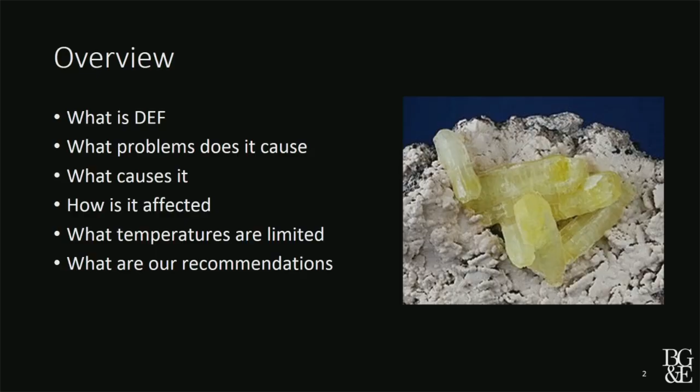Thank you very much. So ettringite is a natural material, it can be found in the world naturally. I won't go too much into what ettringite is, but I will cover some of the things I've learnt over the past 30 years.

My first experience with ettringite, or delayed ettringite, was walking the railway line between Washington DC and Boston. We covered something like 200 kilometres of railway ties, documenting the date they were made and which location in the casting unit they were from. At this stage, walking for 12 weeks documenting ties with 8 other people, we didn't know what we were looking for, but we did notice that a lot of them were really badly cracked.

Then we'd come to things like bridges, and they stopped being cracked. We'd get to the other side of the bridge and they'd be cracked again. We'd go under a tunnel, they'd stop being cracked. So what happened during that period is we were actually looking for periods of railway sleepers, railway ties, that had been made with different cements and different aggregates.

There were lots of papers produced in the early 1990s related to this particular aspect of delayed ettringite formation, ASR, the combination of delayed ettringite formation and ASR. But unfortunately, we will never know the full extent of the information that was available and that was researched at that stage because it got caught up in a legal settlement.

As part of legal settlements, a lot of information gets put in a box and nobody's allowed to talk about it. There are bits and pieces of that information that are in the public. Some I agree with, some I disagree with. But anyhow, this is what started my road down DEF.

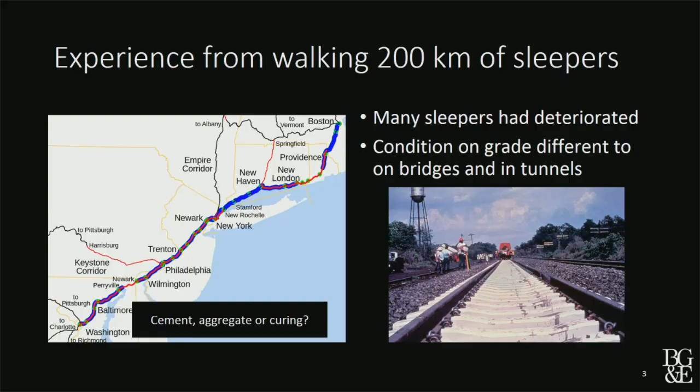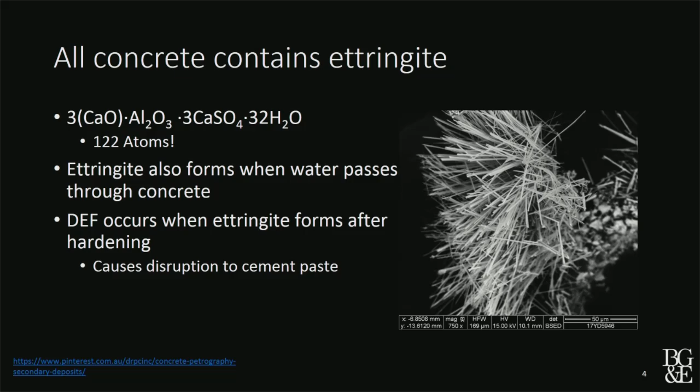So, as we just mentioned, we know about ettringite. This is a picture of typical ettringite that we'll find in concrete, and it always occurs in every piece of concrete we make. So ettringite's not an unusual mineral. It also, if you wet the concrete and dry the concrete, the ettringite will move, it'll appear in air voids. So we know ettringite's mobile, we know it'll form, and we know it's in every bit of concrete.

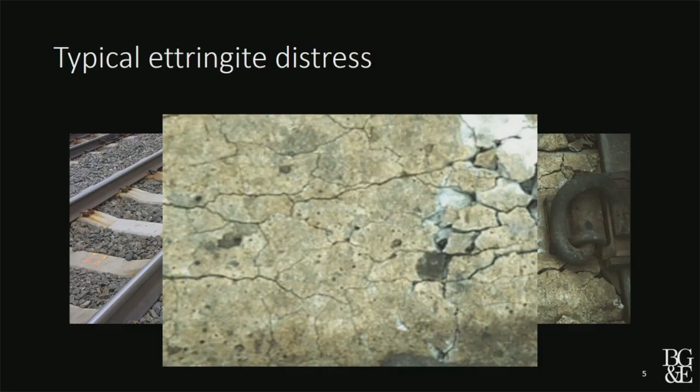So this is the typical concrete distress that was observed on the railway sleepers. It was very rapid - within 5 years of the concrete being made, the concrete was cracking severely, and it was enough to make these railway sleepers unusable and have to be replaced. It was a very large dollar settlement - at that stage, something like $200 million being litigated between various parties.

There have been examples of delayed ettringite formation claimed throughout the world - in France, in Sri Lanka, in Europe, in the United States, in Texas. So the question is, what's going on with this? Why did it suddenly appear?

One of the petrographers that I knew many years ago said we probably didn't know what we were looking for. We didn't have the tools of scanning electron microscope, so we probably attributed some things that were delayed ettringite to ASR. So it may have been a difference of how we look at information - we might have had delayed ettringite formation occurring for the last 50 years and didn't know about it.

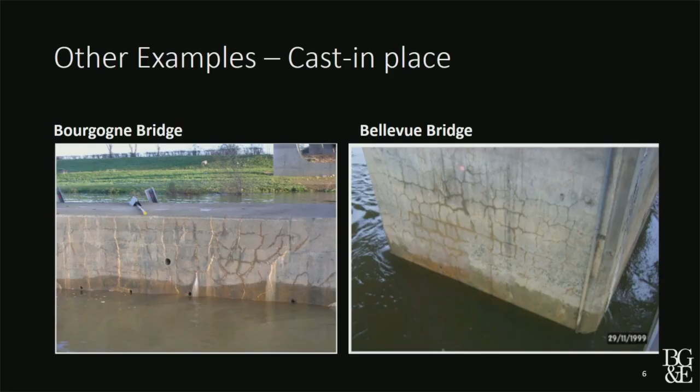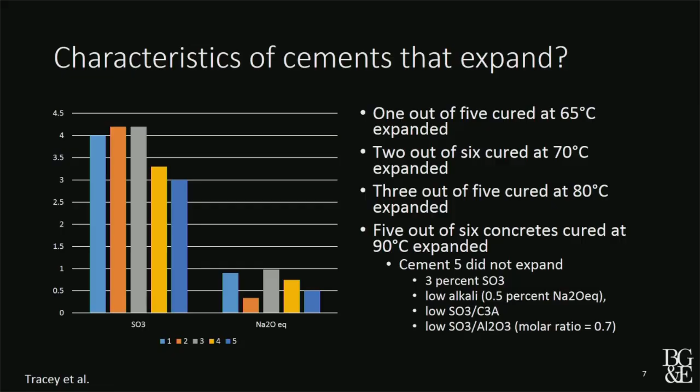There's a piece of research which I think needs to be brought back and looked at, and this was by Kelham, who did a whole bunch of laboratory tests on a very wide range of cements. He looked at 128 different cements, and he found that...

Curing them at normal temperatures, nothing expanded. Curing them at 70 degrees, nothing expanded. Curing them at 80 degrees, he had 14% of the cements expanding, which meant most of them didn't expand. But once he got to 90 degrees, over 50% of those cements showed expansion. So this was showing that there is a critical curing temperature, but it's also showing that the cement chemistry may be playing a more important role in the expansion than actually the temperature itself.

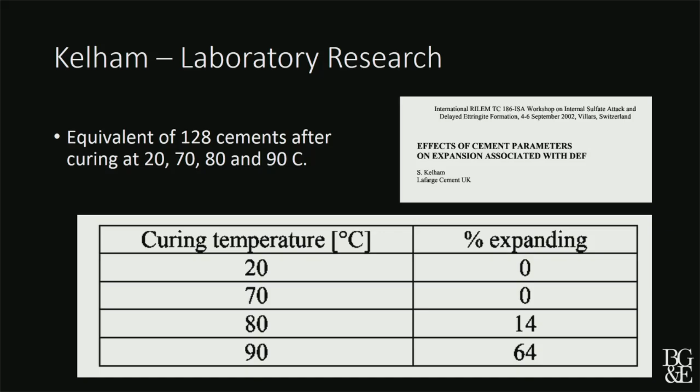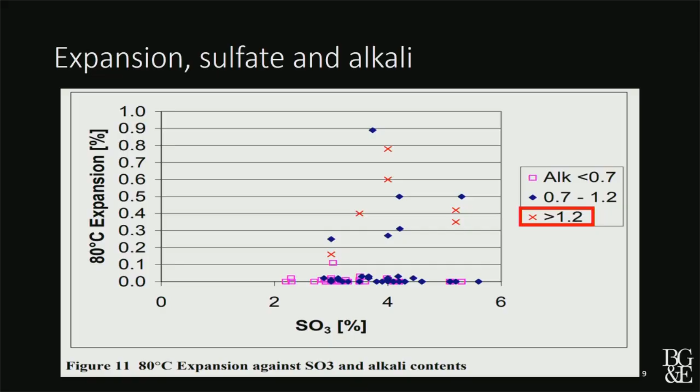So out of all the data that Kelham produced, he came up with an equation where he could relate the cement chemistry to whether it did or didn't expand. He had a critical value, and he found that C3A content, those rapid accelerating cements commonly used in precast, were more susceptible to delayed ettringite formation. Those with certain sulfate and alkali contents were also susceptible.

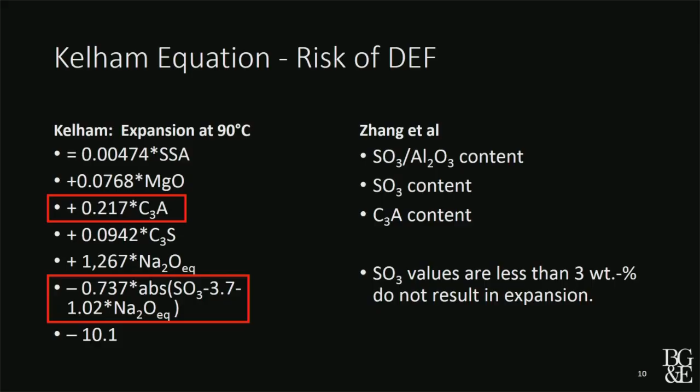So we had a formula that helped us analyse some of the early cements 20 years ago. There have been other people develop equations. Zhang developed another equation where he looked at sulfate aluminate content ratios and the C3A contents. But overall, the research has shown that sulfates less than 3% don't result in expansion. I think that's what we're seeing fairly consistently, that cement chemistry and sulfate content is a critical factor.

So one of the things I did in the 90s was to take the equation that Kelham had developed and apply it to the cement databases. In the United States, there were two cement databases that Portland Cement Association maintained. One was developed in 1953, and the other in 1994. From that research, I was able to show there was an increase in the likelihood of delayed ettringite formation with the modern cements compared to the older cements.

Now, all of those four factors are great if you want strong concrete really fast.

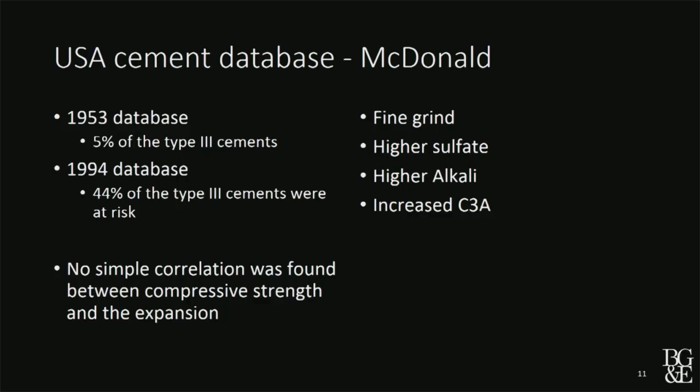I'm going to skip over that one.

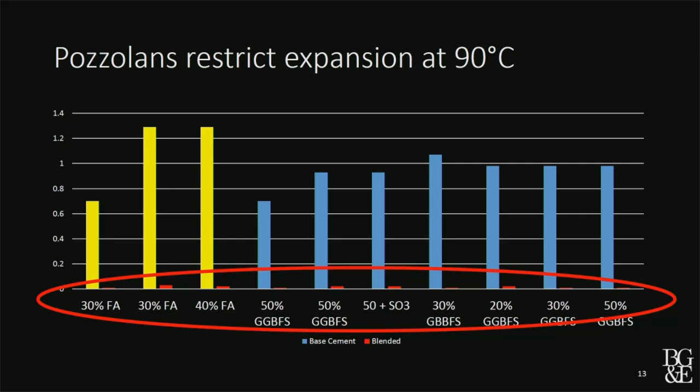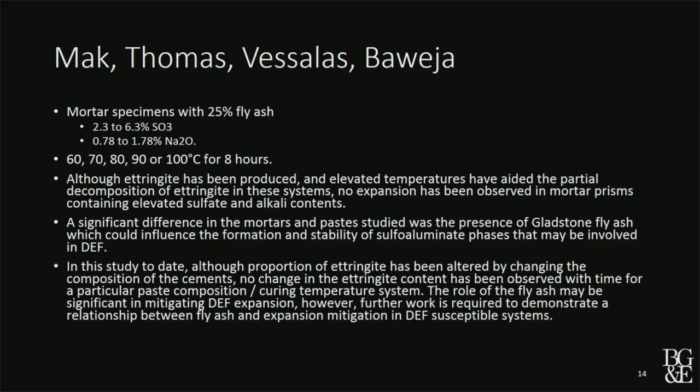So there's a difference between concretes using plain cements and concretes using mixtures of cement and pozzolans. There's been additional work done - this is also work from UTS, where they looked at mortar expansions, and they were unable to really come up with expansions using Australian concretes. So the studies keep going on. Australian concrete, with its low sulfate and low alkali, is more immune to delayed ettringite formation.

Now you may wonder why I'm back talking about delayed ettringite formation. I thought I'd left that subject 20 years ago. But it turns out to be important when you're actually trying to place mass concrete. Because in mass concrete, the concrete develops heat, and we're now having to match temperature limits assigned by the specifying agency that may make it very difficult to place the concrete.

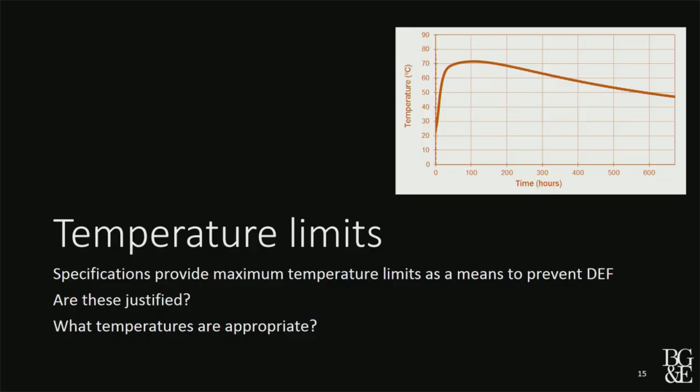I remember about 25 years ago, the Portland Cement Association was seriously discussing putting a limit on the temperature of concrete at 60 degrees Celsius. To which I responded, that's fine, it's your product, do whatever you like. But I said don't expect to sell concrete in Texas, or ever sell cement to the precasters, because it's very hard to make concrete in those two atmospheres below 60 degrees Celsius. So what is the right temperature is really the whole thing.

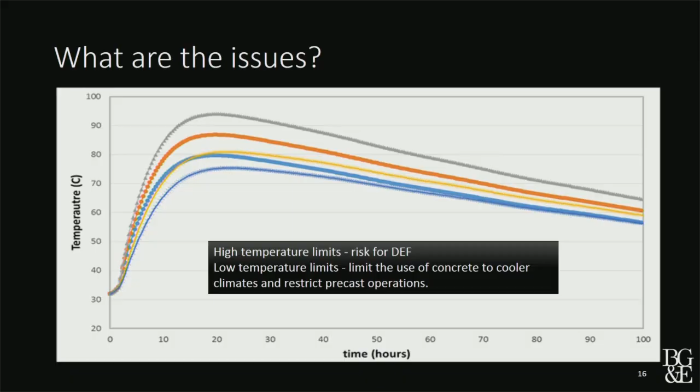When we look at temperatures in mass concrete, we can change it using pozzolans, we can reduce the temperature, but sometimes we just can't get the concrete cool enough to meet very restrictive temperature restrictions. When I looked at the temperature limits worldwide and those in Australia, typically Australia has adopted lower restrictions for temperature than elsewhere. The difference typically at 75 degrees is out of AS 5100, 70 degrees appears in some of the government specs. It makes it very difficult to place concrete that's sort of 2 metres thick without exceeding those temperatures.

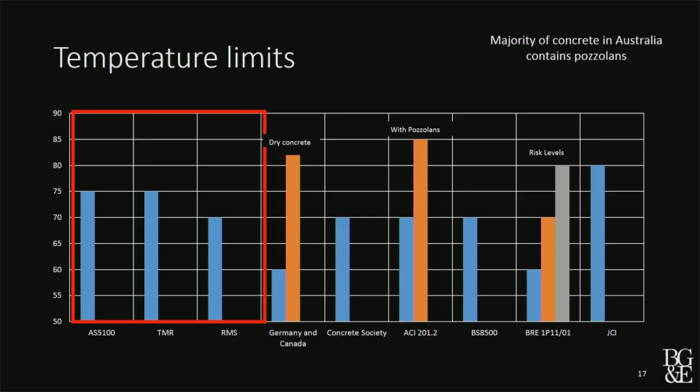You're looking at having to reduce your concrete temperatures down to something like 26 degrees. How do you get there? You use ice, you might need cold water, you might need to cool your aggregates, but again you may exceed those limits. A number of different groups also allow increased limits if you have pozzolans in your concrete. This is the approach taken through ACI and also more recently through the Japan Concrete Institute, where they allow you to go to a higher temperature if you've got pozzolans in your concrete.

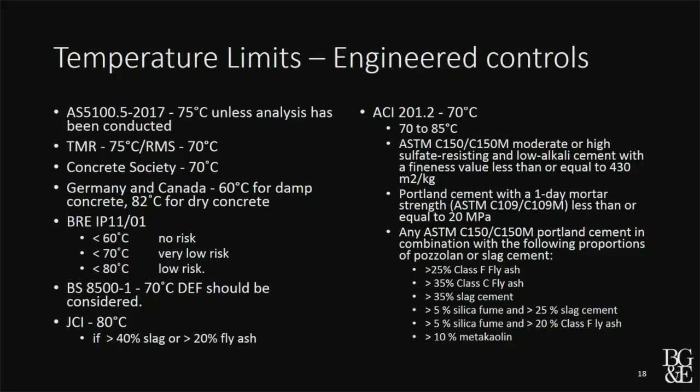So all the various limits are in the paper, I won't discuss them here, they're all available. But again, as you know from the research from Kelham, adding pozzolans to concretes basically eliminated the risk of expansion, even when the concrete was heated to 90 degrees Celsius.

So I want to conclude with: delayed ettringite formation has been observed in a very limited number of structures, but I'm not going to discount those structures - those that have DEF, it's a significant problem. So people have put limits, and those limits on temperature range anywhere between 60 and 85 degrees. Choosing those low limits may really restrict the use of concrete. It's more linked to the cement chemistry than the temperature itself.

You can make cements that are immune to DEF at 90 degrees Celsius. Now, they might not be all that useful as a cement material - they may not get fast, they may not get strong, but you can do it. The additions of pozzolans, slags, and fly ash basically eliminate the risk of delayed ettringite formation. For this, I'm recommending that agencies in Australia consider changing their specs to allow modification to these temperatures if pozzolans are being used. Thank you.